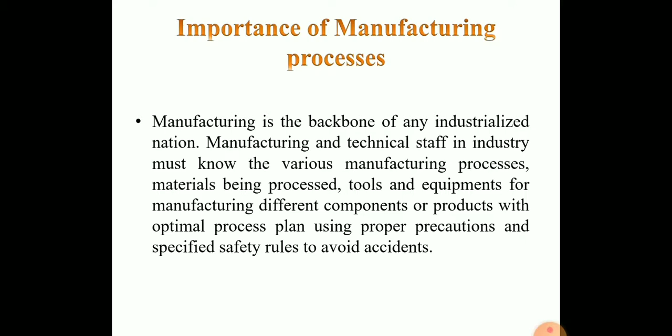of different engineering materials, tools, equipment, manufacturing processes, basic concepts of electromechanical control of machine tools, production criteria, characteristics, and uses of various testing instruments and measuring or inspection devices for checking components or products manufactured in various manufacturing shops in the industrialization environment. This is the importance of manufacturing processes.

Next is scope. Today's competitive manufacturing era of high industrial development and research is being called the age of mechanization, automation, and computer integrated manufacturing.

Due to new research in the manufacturing field, advancement has come to such an extent that every different aspect of the technology has become a full-fledged fundamental and advanced study in itself. This has led to the introduction of optimization in design and manufacturing of new products.

New developments in manufacturing area are aimed at transferring more skill to the machine for considerable reduction of manual labor. The scope of the subject of workshop technology and manufacturing practice is extremely wide, as it specifies the need for greater care for man, machine, material

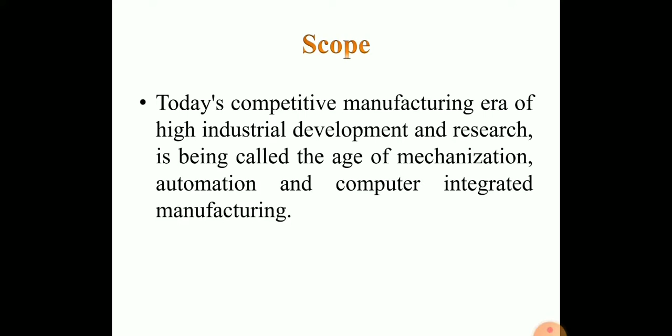and other equipment involving higher initial investment, by using proper safety rules and precaution. The thorough and deep knowledge in the course of study of this important subject is therefore becoming essential for all kinds of engineering to have a sound foundation in their profession. This is the scope of the manufacturing process.

Next topic is classification of manufacturing process. This is the most important question asked in GTU exam paper for final GTU exam paper. This is a 7 marks question in GTU question: explain the classification of manufacturing process.

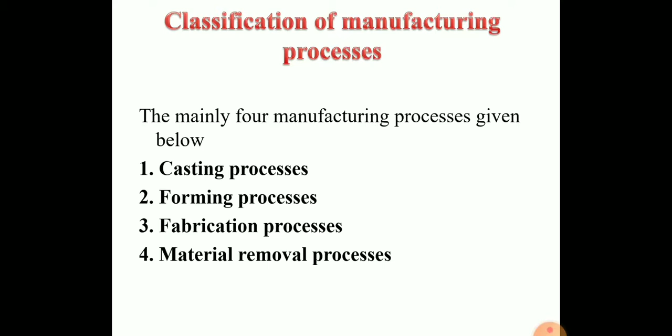There are mainly four manufacturing processes given below: first one is casting process, second one is forming process, third one is fabrication process, and fourth one is material removal process. First one is casting process.

These are the only processes where liquid metal is used. Molten metal is poured into the refractory mold cavity and it's allowed to solidify. The simple definition of casting process is that molten metal is poured into a mold.

Molten metal is poured into mold. Molten metal is in the liquid form. Molten metal is poured into a mold, then it solidifies, and then it gets shape. It's called a casting process.

The types of casting process are given below: first one is gravity die casting, shell mold casting, precision investment casting, continuous casting, die casting, and centrifugal casting. This is the main importance of types of casting process.

First one is the gravity die casting process. In this casting, the molten metal is poured by gravity. No external force is used in this process, only gravity is used, and then the casting process is done.

Second one is the shell mold casting. In this casting process, we first make a shell, then the molten metal is poured into the mold. Third one is precision investment casting.

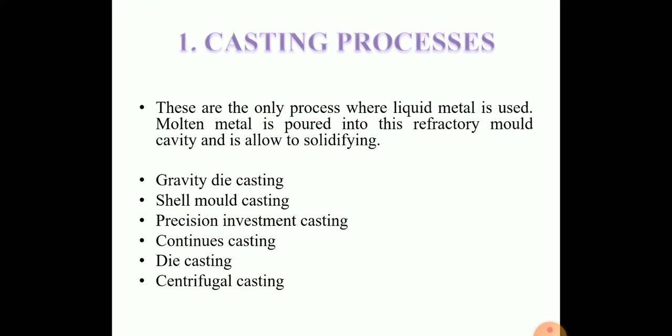Next is the second process: forming process. This is a solid state manufacturing process involving minimum wastage and faster production. In forming, the metal may be heated to a temperature slightly below the solidus temperature, then a large force is applied so the material flows and takes the desired shape. Simply put, first the metal is heated, then large force is applied, the material changes shape, and that is called the forming process.

In forming process, there are mainly two types: hot working process and cold working process, depending on the recrystallization temperature. Recrystallization temperature is the temperature at which the grain structure is reformed. Above this temperature is hot working process, and below it is cold working process.

The types of forming process: first is rolling process. In rolling, there are two-roll mills, or you can use 3-roller, 4-roller, or cluster mill. In this rolling process, the material dimensions are changed and the thickness of the material is reduced.

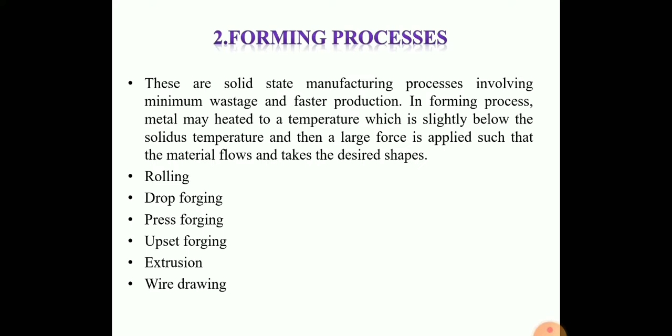Then fabrication process, the third process. Fabrication process essentially involves joining pieces either permanently or temporarily. The joining can be achieved by heat, pressure, or both. Simply put, fabrication is where two similar or non-similar materials are joined, with or without pressure, and with or without filler material, to join them permanently or temporarily.

Let's discuss the types of fabrication process: gas welding, electric arc welding, resistance welding, brazing and soldering. First, gas welding - the types are oxy-acetylene gas welding and oxy-hydrogen gas welding.

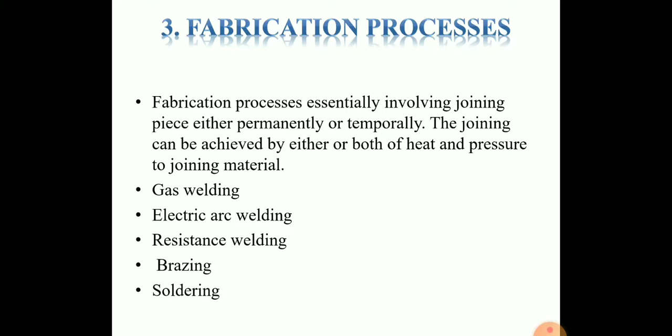Second is arc welding - the types are carbon arc welding, TIG, and MIG. Then resistance welding - the types are spot welding, seam welding, and projection welding. Then brazing and soldering.

The last process is the material removal process. This is an important manufacturing process to remove unwanted material in the form of chips from the material by a harder tool so as to obtain the final desired shape. In this process, unwanted material in the form of chips is removed, and then the final finishing shape is done.

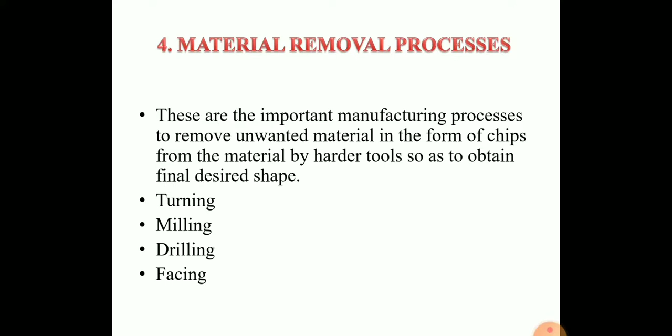The types of machining operations include turning, milling, drilling and facing. These operations are used for the removal of unwanted material like chips in this production system.

The art of converting raw material into finished goods with the application of tools and manufacturing process is known as production, and the manufacturing process is just a part of the production system.

The production system is the part of an organization which produces the product of an organization. It is that activity whereby resources flowing within a defined system are combined and transformed in a controlled manner to add value in accordance with the policies communicated by management.

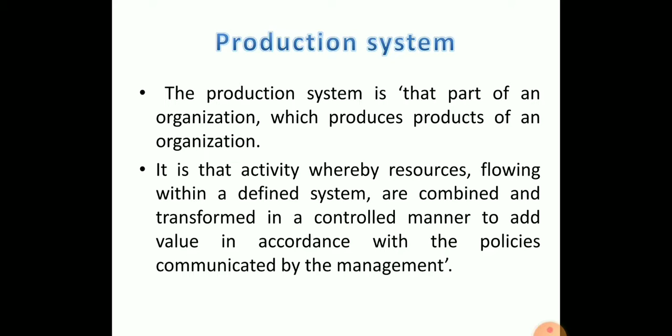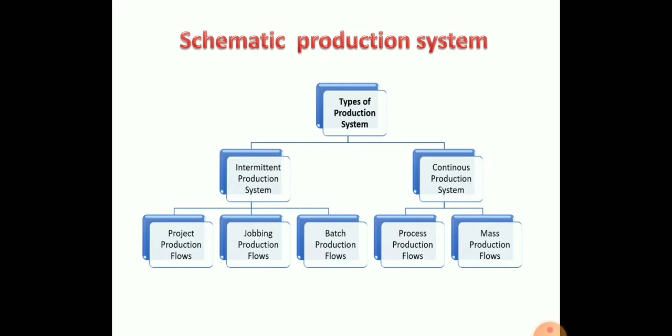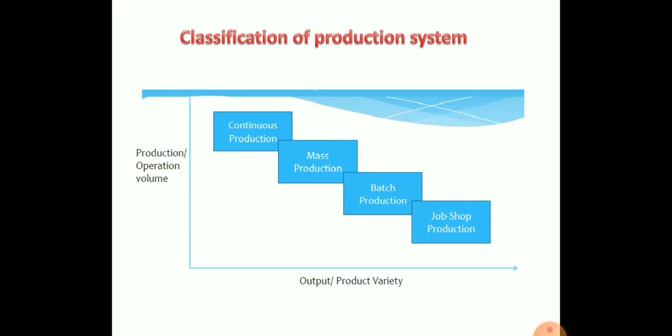Then the classification of production system. In this type of classification, production is based on operation volume and the output product variety. It is a classification based on quantity and quality, which define a classification of production system. There are four types: first is job shop production, second is batch production, third is mass production, and fourth is continuous production.

Let's talk about the first type of production, which is job shop production. In this type of production, an operator or group of operators work upon a job and complete it before proceeding to the next job, which may be different or may be another of the same type.

Job shop production are characterized by manufacturing one or few quantities of product, designed and produced as per the specification of the customer within a prefixed time and cost.

The distinguishing features of this are low volume and high variety of product. An example of job production is aeroplane manufacturing. Job production is normally concerned with special projects, models, prototypes, special machinery or equipment to perform a specialized and specific task, such as large turbo generators, large engines, boilers, shipbuilding and aeroplanes, etc.

Job production is characterized by: first, high variety of product and low volume. Second, use of general purpose machine and facility. Third, high skilled operators who can take up each job and challenge because of uniqueness. Fourth, large inventory of material, tools and parts.

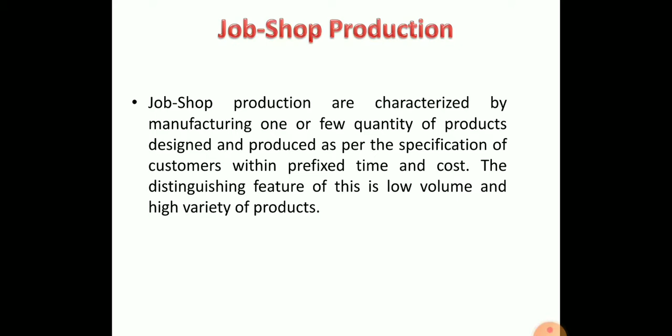The limitations of job production: first, higher cost due to frequent setup charges. Second, higher level of inventory at all levels and hence higher inventory cost. Then, production planning is complicated and large space is required. This is job production.

The second type is batch production. In batch production, manufacturing of a number of identical articles to fulfill the specific and continuous needs of customers is called batch production.

The American Production and Inventory Control Society defined batch production as a form of manufacturing in which the job passes through the functional department in lots or batches, and each lot may have a different routing. It is characterized by the manufacturing of a limited number of products produced at regular intervals and stocked awaiting sales. Batch production is a very common feature in industry - machine tool work, forging and casting process, glass manufacturing, and chemical processes very often operate on a batch basis.

The characteristics of batch production are: first, shorter production runs; plant and machinery are flexible; plant and machinery setup is used for production of items in a batch, and a change of setup is required for processing the next batch.

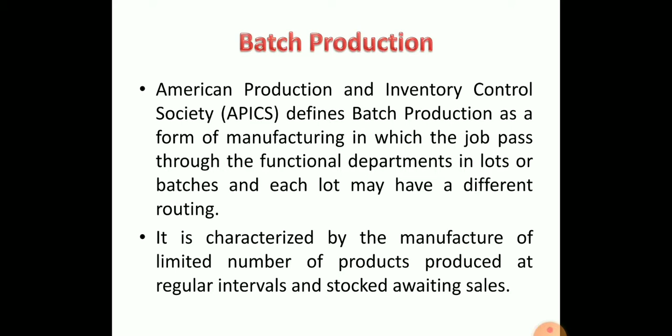The third type is mass production. Manufacture of discrete parts or assemblies using a continuous process is called mass production. This production system is justified by a very large volume of production. The machines are arranged in a line or product layout. Product and process standardization exists, and all outputs follow the same path.

In this type of production, the quality and quantity depend on each other. The quality is very low and the quantity is high.

The features of mass production are characterized by standardization of product and process sequence, dedicated special purpose machines having higher production capacities and output rates, large volume of product, shorter cycle time of production, lower in-process inventory, and perfectly balanced production lines.

The advantages of mass production are higher rate of production with reduced cycle time, higher capacity utilization due to line balancing, and fewer skilled operators required. The limitation of mass production is that breakdown of one machine will stop the entire production line.

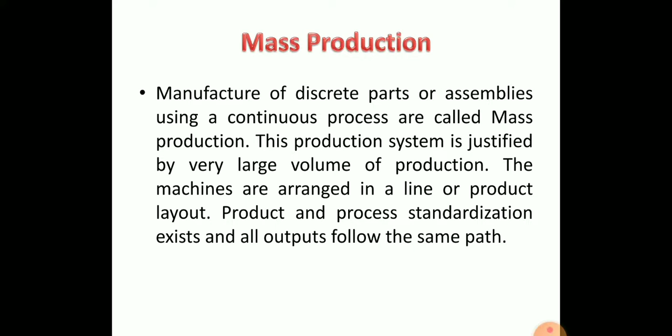Line layout needs major change with a change in product design. There is high investment in production facilities, and the cycle time is determined by the slowest operation.

The last production system is continuous production. In this type of production, a large number of identical items are produced. Production time and cost are reduced by using auxiliary aids such as special tools, fixtures, positioners, feeders, material handling systems, special inspection devices, and special weighing and packaging equipment.

Production facilities are arranged as per the sequence of production operations from the first operation to the finished product. Items are made to flow through the sequence of operations via material handling devices such as conveyors, transfer devices, etc. Continuous production is characterized first by dedicated plant and equipment with zero flexibility.

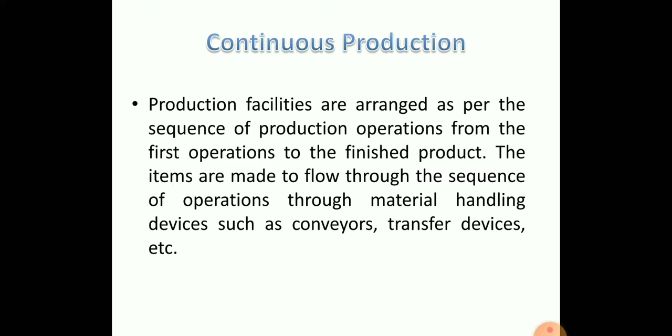Material handling is fully automated, with process flow in a predetermined sequence of operations. Component material cannot be readily identified with the final product, and planning and scheduling require routine action. These are the types of production systems.

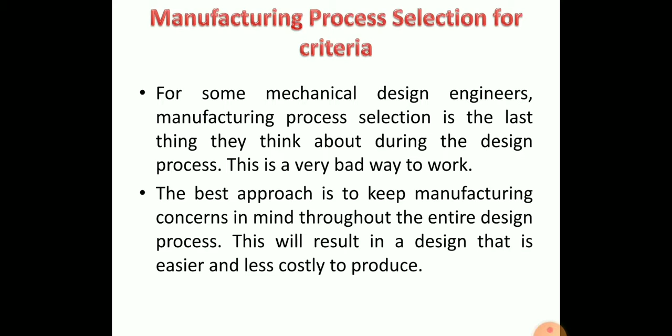This is a very bad way to work. The best approach is to keep manufacturing concerns in mind throughout the entire design process. This will result in a design that is easier and less costly to produce.

Some of the criteria for manufacturing process selection include: quantity of the product, cost for tooling, manufacturing machines and equipment, time required for processing, level of skilled labor required, process supervision, energy consumption, and availability of material and cost of material.

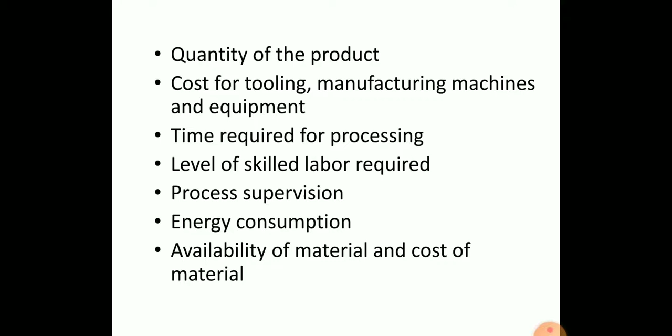Other criteria include capability required to process material, product dimension and size, surface finish required, design tolerance, waste produced by the process, maintenance cost, and other costs. These are the criteria for selection of manufacturing process.

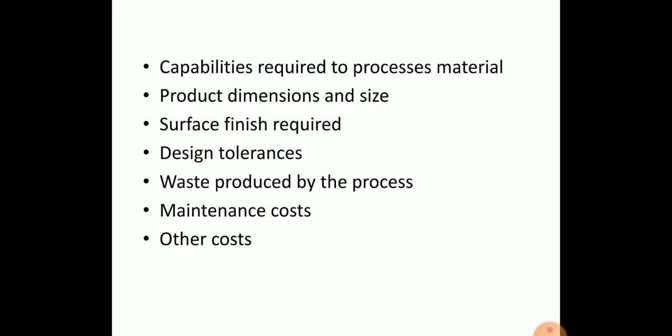An experienced manufacturer will have a good idea of all the process selection drivers mentioned above. Depending on the product design and manufacturing considerations, a good manufacturer will be able to guide you through the selection process.

In this topic, we studied two things: types of production systems and the selection criteria for manufacturing process. Thank you.